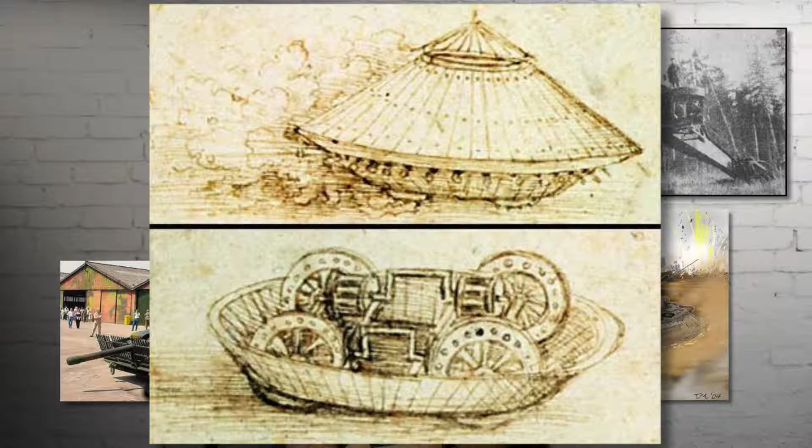So at the larger end of things, you can make an argument that these are all tanks, all four vehicles. On the top left, you have Leonardo da Vinci's tank. As a piece of trivia, if you look closely at the image, you'll see there was a deliberate design flaw that Leonardo put into his design, so that if somebody stole his plans and built the tank according to them, it would not work. Have a look, see if you can figure it out, and show off by putting it in the comments below.

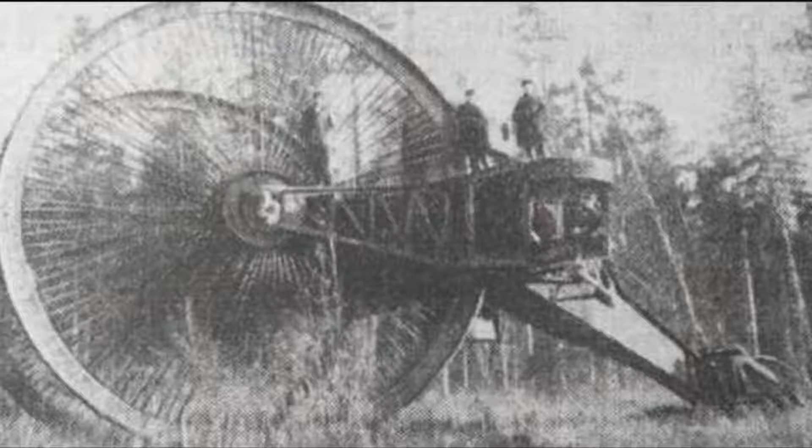The S tank, well, we all know about it now because of the Swedish line. A lot of people will say it's a tank destroyer, but the Swedes strongly disagree. As far as the Swedes are concerned, it is a tank.

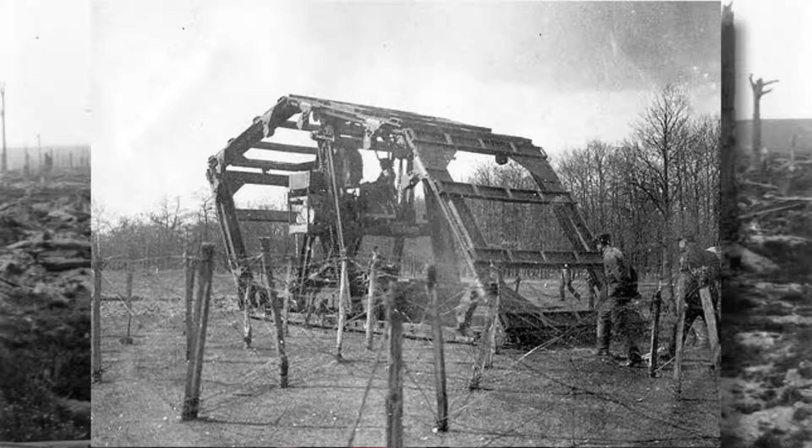So the solution appears - there were a number of different options. The Tsar tank you just saw. The French had the Boirault device, which really was more supposed to be a wire crushing device as opposed to a tank, but it did the same job - it went across no man's land. The British are the first at the door, as we all know, Little Willie and then the Mark I.

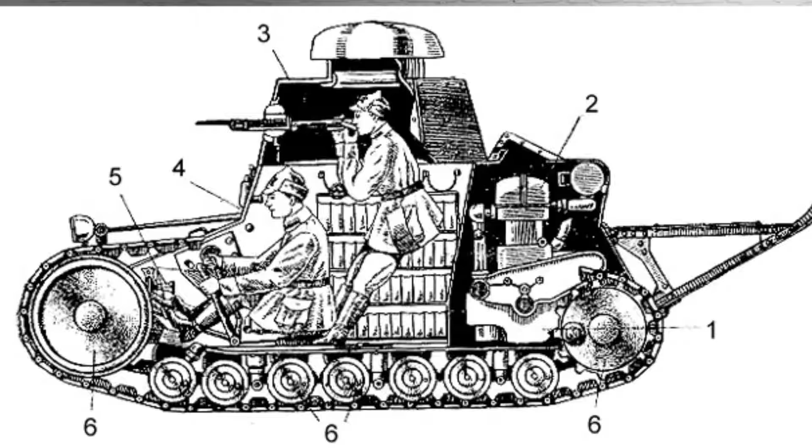And in credit to the French, they also invented the tank completely independently, because the British weren't telling the French what they were up to, and at about the same time the French also had the same idea. But they get it right with the FT, with the fully traversing turret, full-length track, driver in the front, engine in the back, fighting compartment in the middle. Pretty much every tank ever since has followed this basic design philosophy - AMX-13, Merkava, that's pretty much the gist of it.

Of course, you've got the light tanks like Scorpion and whatever as well, but that's a little off to the side. So that was why the tank exists. Now let's get into a little bit of the nomenclature and some of the design details as to why a tank looks the way a tank does.

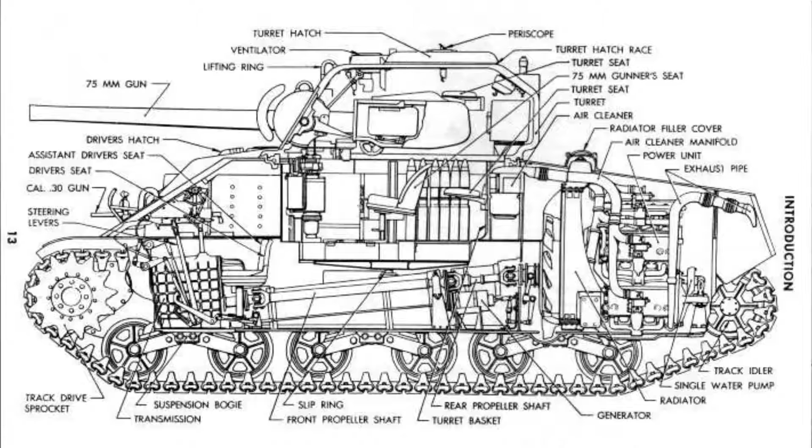So what we have here is a diagram of a typical common or garden tank. It is, as you can see, an early model M4. Various components - well, yes, the Army have helpfully labeled everything if you want to zoom in and look at the individual components, like the 75mm gun, the turret hatch. You can also see the prop shaft that goes from about halfway up the hull from the radial engine down to the base of the floor at the front with the transmission, and that's why the M4 is so high.

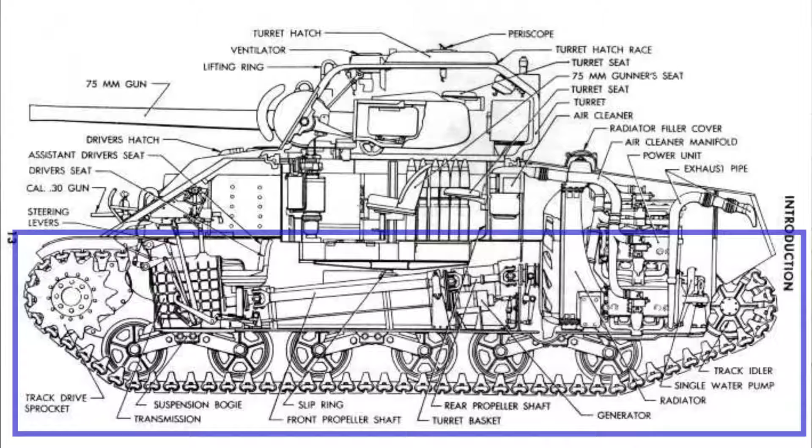However, the bottom line is that the bit you were looking for is the full tracked chassis. This is pretty much standard - I can't offhand think of any tanks today that don't have a full track chassis. Up at the front, you have the driving compartment. Today, it's just the driver's hole and nothing else. Back in World War II, you also had the bow gunner located in the driver's compartment. In the center, you have the fighting compartment. The fighting compartment can or need not include a turret.

Bingo, the S-tank, as we've seen before. But the terminology is good for assault guns and so on as well. So the fighting compartment is where the crew actually fight the tank. The engine compartment, no guesses for what that does - it holds the engine.

Of course, the Navy did invent tanks, so that's why we have so many nautical terms like the hull, the hatches, the decks, and so on.

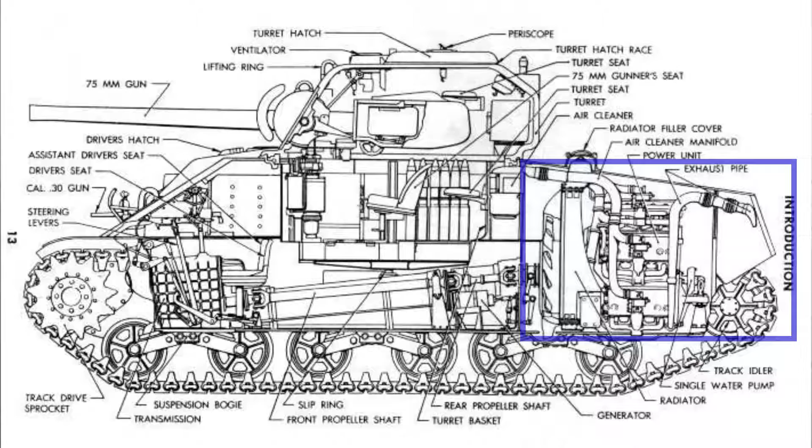So your crewman, who's in it? Well, you got the driver - a very happy little individual, almost always sits at the front of the hull. There have been some exceptions in the game.

You got the Object 416, you had the MBT-70. Part of the problem was that you had to have a system that would allow the turret to traverse while still being connected to the hull and the tracks and the engine and so on. Didn't work out too well. The 416 had traverse limitations - the M53-55 artillery piece that basically could only drive when the gun turret was facing straight forward, if I recall.

The MBT-70's driver had his own little counter-rotating cupola. The turret went all 360s, and he could drive and always face forward no matter what the turret was doing. The end result of that was he got a motion-sick driver. So the bottom line was that after many attempts, nobody has as yet decided that it is a good idea to place the driver in the turret, at least for a general tank.

There have been cases where the crew goes down into the hull, the T-14 for example being a recent case in point, but again this is something of a revolutionary concept.

The gunner, well gee, what does he do? He controls the gun. Usually found in the turret at the front, sometimes in front of the commander, not always.

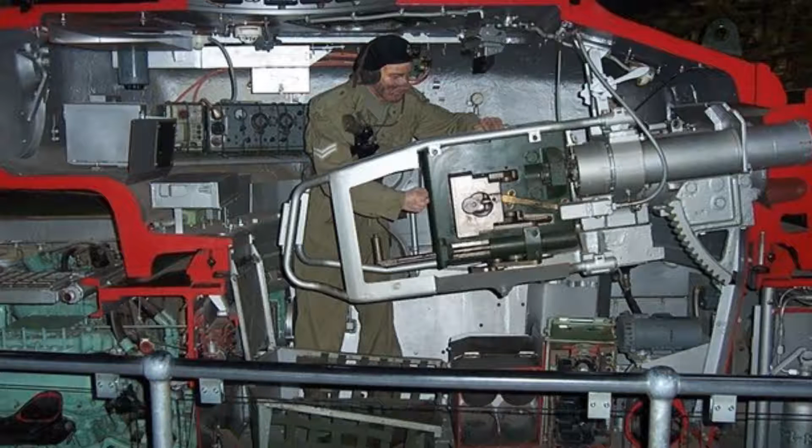The loader. This is the famous Bovington cut-in-half Centurion, and the nice thing about it is it shows you pretty easily the amount of space he has to work with. This mannequin is short, and you can also see, as a matter of tank design, how much room the breech has to elevate before it hits the top of the turret, and that brings you to gun depression.

We're going to be coming back to gun depression a little bit in the future.

And finally, the tank commander. Yes, you're the guy, you get to look all cool, you stand out on top of the tank. If you ever get the chance, be a tank commander - it's a heck of an experience. Yeah, the whole shooting at you thing happens as well, but you get over that, usually.

And the BOG, the bow gunner. Sometimes also known as the radio operator, especially if he doesn't have a bow gun of his own to play with. He will usually be found at the front of the hull, next to the driver.

And this was a position which was basically deleted shortly after the war. But in the 1950s, they decided it was a waste of space to have that extra man there. They didn't need him - it wasn't that critical for maintenance. And the ability to shoot on the move was getting better. So there was no need for the bow gun, which was considered to be semi-stabilized, because no matter what the tank was doing, the bow gunner could still adjust for motion. Whereas if you didn't have a stabilized gun, the coaxial was useless on the move.

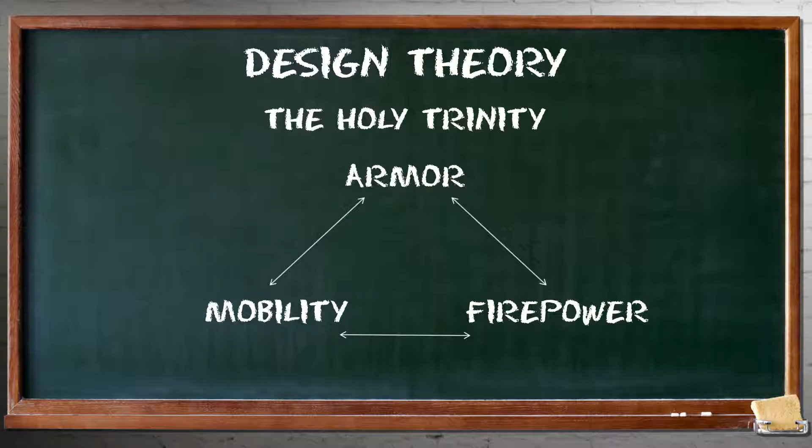Okay, design theory. You will be familiar with the Holy Trinity: mobility, armor, and firepower. And as a general rule, especially in the World War II era, you could have any two of these three. So you could have armor and firepower, like a King Tiger.

You could have firepower and mobility, say an M18, but you didn't really have engines powerful enough and structures good enough to have all three at once. So until the most recent generation of tanks, and still to an extent it's still valid, you do have that question between mobility, armor, and firepower. You have to make that balance.

Today, the engines are good enough that the tanks are plenty fast, but now you're talking into more operational and strategic mobility. You still have a 70-ton tank. So yeah, it can now do 40 miles an hour, but if the bridge that it tries to cross in Africa or wherever can't hold the weight of the tank, your mobility is still limited.

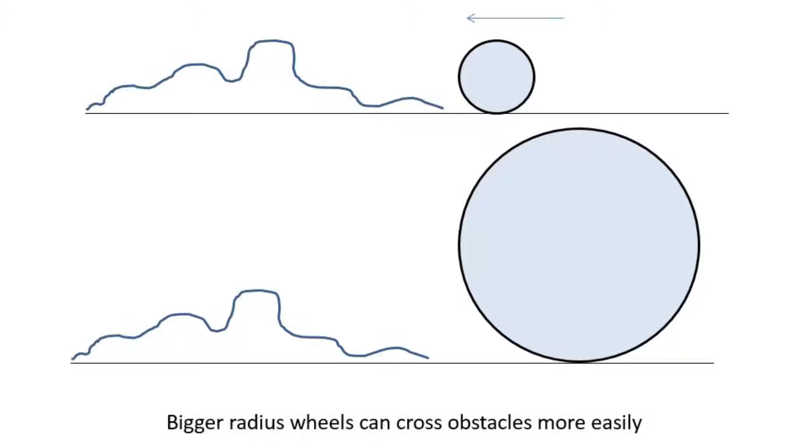So, crossing obstacles. General rule is if you have a wheeled vehicle, the bigger the wheel, the bigger the obstacles you can cross over. I have a little drawing there - a small ball rolls along, gets to a bump or irregularity in the surface, and it will stop. You get something big like a beach ball, that same irregularity which would stop a marble will not stop the beach ball - it will just crawl right on over. The Tsar tank we saw earlier was a perfect example of this - you use a huge radius wheel and it'll crawl over, in theory, anything. Of course, you had a horsepower issue, but that's another matter entirely.

Now, how does this apply to the tank? If you think about it, the track is simply part of the circle without having to have the entire circle. So in World War I, you got the Rolls-Royce armoured car - excellent armoured car - but look how small the wheel arc is compared to the wheel arc on the Mark IV. What you can see is huge. So the Mark IV has no difficulty getting over a lot of the obstacles that the Rolls-Royce would have, because of that part of the radius.

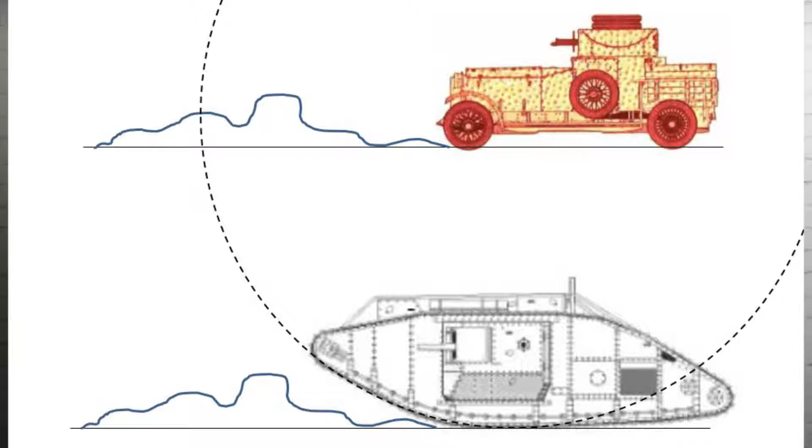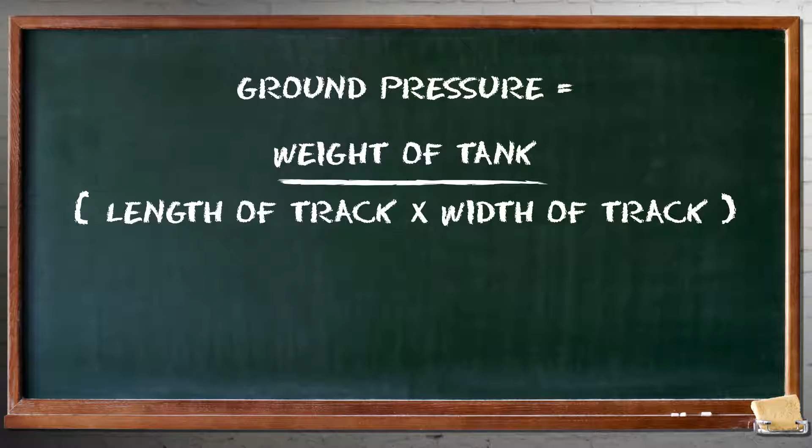All right, so a little bit more math. If ground pressure is the weight of the tank divided by the length of the track multiplied by the width of the track, i.e. surface area - long tracks are better, right? Well, yes and no. The KV6 - we did not invent this, go online, there's a wonderful backstory to the KV6. There was actually another KV6 which, if I recall, was a flamethrower, but this particular one is quite amusing.

The problem with longer tracks is that it makes turning more difficult, because when you're pivoting your track, the bits at the outside end have to go much further for the same arc of traverse. This builds up dirt as well as resistance. The dirt has a good chance of getting caught between the wheels and the track, and it'll pop it off the center guide. You've now lost your track - you've walked it off, which is really annoying.

So shorter track length vehicles will turn better. Turning is accomplished usually by varying the speed of your tracks - most people have figured this out by now. One track goes faster, the inside track goes slower, and you go around.

There are a couple of quirks, for example track warping vehicles like the Tetrarch, like the Universal Carrier. What they will do is actually bend the track itself, and that will allow you to do nice gentle turns without any of the issues of loss of power due to the various different steering systems. Very difficult to use on a heavier vehicle though, which is why you didn't see it on anything else, but it was an interesting way of getting around the problem. Of course, if you spun the wheel all the way around, one track would lock and then you'd spin normally, but innovative.

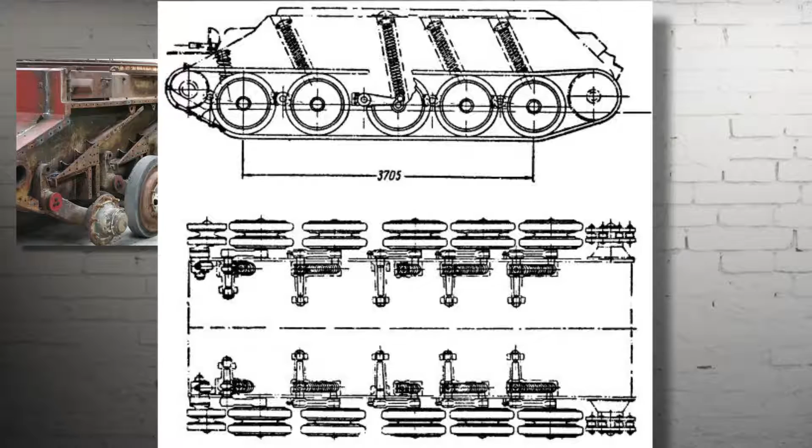So the top image is of a T-34. The springs you can see go all the way from the base of the tank to the top of the hull. The bottom image is one of the British cruisers, and the springs are missing, but you can see where they would go behind the armor plate. So your bogie breaks - a couple of bolts, replacement, you're done. A spring breaks on your Cromwell, and all of a sudden you're removing track, you're removing wheels, and you're removing armor plate. So that was one of the problems with the Christie suspension.

And part of the reason is it's a little bit overrated, and it also took up a lot of internal volume that a bogie doesn't. Torsion bars are the more typical form of suspension today.

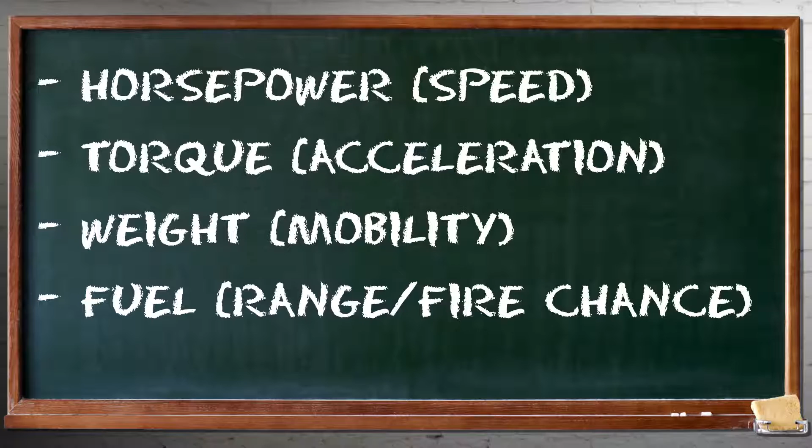So that was just the track. Then you got to get the thing to go, and that means your engine. Factors which affect your engine: you're looking at horsepower, torque, weight, and fuel. Horsepower is basically how fast you go. Torque is how quickly you'll get there, or if you go up to a tree or a wall or something like that, how much of it you'll take with you when you go through. Engine weight is a factor - a lot of the early war engines were actually aircraft engines because they gave a high power to weight output.

Later on, engines got more powerful, so it was a bit less critical. But even today, if you look at the turbine engine on the M1, it provides a lot of power for very little weight. You save a couple hundred kilos here, a couple hundred kilos there, and soon you're talking some serious tonnage. It does start to make a difference where you can add or reduce weight around the tank.

Even today they're talking about replacing hydraulics with electrics, and that will save, I think, about 1.5 tons of hydraulic piping. Fuel.

It's got two factors. One is your fire chance, which is a little bit overrated, but I'm sure we'll come back to that in a future video. And the other is range - how far will you go on a single tank of gas?

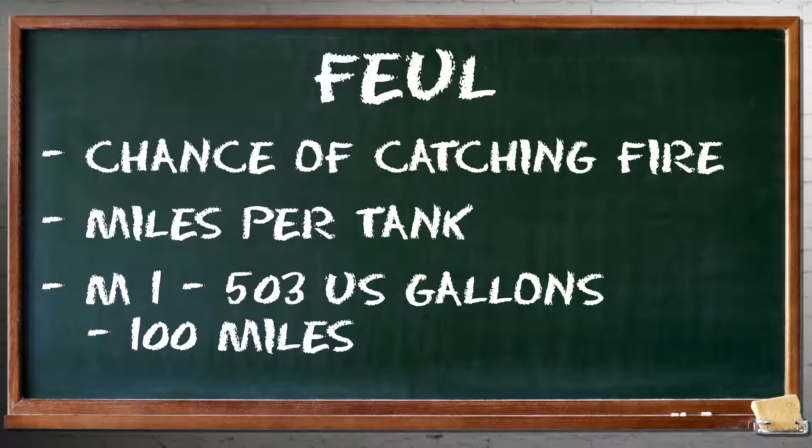The M1 is 503 US gallons, and you're pretty much looking for another fuel truck within 100 miles. It'll go further if you're cruising the whole way, but in reality you're never cruising at a constant speed for 250 miles, except on the test range.

This would be a factor all the way down through the war, of course. So even in the race across France, the Allies were limited by the amount of fuel they could get through - that's another argument entirely. So yeah, you have the logistic issue, how do you get the fuel from, let's say, the UK to France, and hence you got Pluto, a pipeline under the ocean.

But then once it got onto the land, you had to get it into the tank itself, and that was by jerry cans, or in British terms, flimsies. You're talking about filling up several tanks, 80 gallons, let's say 100-something gallons, with individual cans. This is really annoying and takes a very long time, so the less you can do it, the better. It's more efficient on your logistic tail, it's easier on the crewman, and so forth.

So ideally you want to get the best possible range for your tank as you can, which then brings you to the diesel versus petrol question. Diesels will get you further range, but back in World War II era, they weren't quite as powerful as they needed to be compared to petrol engines, or gasoline if you're American. So that's why most tanks around the world were using gasoline.

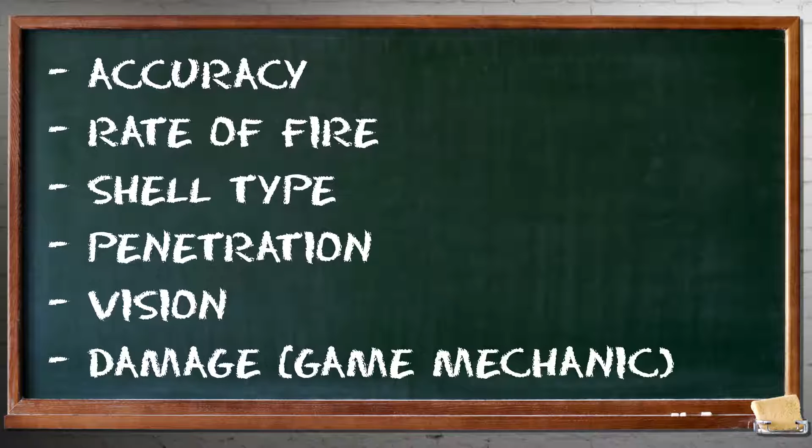Firepower - well, these are some of the factors that affect firepower. Accuracy is one of them, rate of fire, shell type, penetration, and vision. And then, of course, in game terms, damage done at the other end. If any of these things fail, your purpose of the tank is gone.

For example, vision - he who sees the enemy first will probably shoot first and will probably win. It's something a lot of people don't look at when they evaluate a tank. Oh, the Panther had the L70 gun, which has huge penetration and is very accurate. Yes, but if you can't find a target to hit in the first place, what good is your gun doing? On the other hand, you may have the best vision in the world and auto tracking and so on, but if your gun will just ricochet off the target, what's the point?

So you do have that balance as well, but they're all different factors. Different tanks achieve them to different levels.

Things that affect accuracy: the speed of the round. This does two things. One, it reduces the amount of lead that you need to hit the target. Try hitting a light tank in World of Tanks with a KV-2 that's careening along at 50 kilometers an hour, versus trying it with something a little bit faster like a Panther. You'll see obviously that the faster round is more likely to hit.

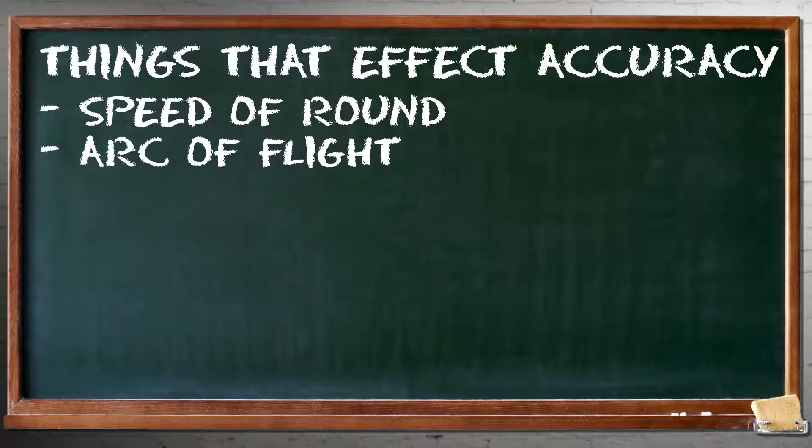It's easier to aim. The other issue is arc of flight - you lob a round, it goes whee in order to hit. Do you like the sound effect? As opposed to the high velocity round, which is simply flat. Now the reason that's important is because, especially back in those days, your arc could be quite high, so you had to know exactly how far away your target was. Otherwise you'd be lobbing it.

If you're off on range, you'll either go over your target or fall short. If you have a flat trajectory weapon, estimate the range close enough that chances are you will hit it. That goes into the whole battle sight range question, which I've talked about elsewhere. Also, if you're a hunter, you may know it as maximum point blank.

Stability of the round also comes into accuracy. If the round is wobbling as it goes down range, chances are you will miss, and you may also get reduced effectiveness because the round will twist instead of punching straight through. This was particularly an issue with early sabot ammunition in 1944-45, and it took quite a while before the US was impressed by the stability of the sabot round before they finally converted to using it.

The quality of the sight. If you aim at a fuzzy thing and your reticle sucks, you're probably not going to hit it.

Quality of stabilization if you're firing on the move. Early British tanks, the stabilization was the gunner crouching down on his knees, bending his knees as the tank moved. It was very basic, but it kind of worked. After that, when the guns started getting heavier, more than about a 6-pounder, you had to start using mechanical stabilization, and that was basically confined to the American tanks until just after the post-war era.

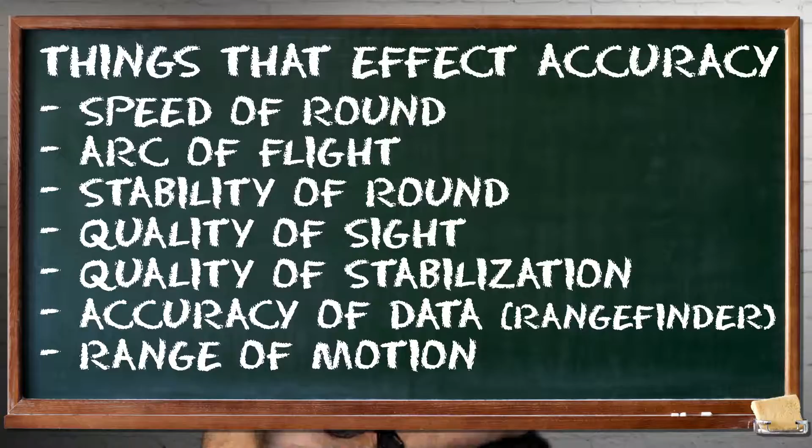All right, so that's simply getting a shell onto the target. Then you have rate of fire. Rate of fire has a couple of different factors. Firstly, obviously, how many targets you can engage in a certain amount of time.

Things which affect your rate of fire: the size of the round - bigger rounds will take longer. How many loaders do you have? If you've got 2-piece ammunition, you may be better off with 2 loaders instead of just 1.

How much space do you have to work with? If there's only a very limited amount of space for you to manipulate that round, it's probably going to take you longer to get the round out through this one path within your turret into the breech and up, than if you could just pick the round up any way you got it and immediately slam it into the breech. So if you've been following my Inside the Hatch videos, you probably have a vague idea of the differences by now.

Number of pieces per round, already mentioned. Time to aim. So what usually happens is that your rate of fire is not actually limited by how fast your loader can put rounds into the breech, especially for the first couple of rounds - he's very good.

After the first 10 or 12 rounds, depending on the tank, things really start slowing down though. Even in a modern Abrams, for example, there's what we call a sweet spot where you can take the rounds out really quickly, but then you start reaching around other parts of the ready rack, and it takes longer to get the round into the tube.

But for aiming purposes, the gunner still has to find the target, lay on the target, and then finally engage. This takes time. Then when you fire a round, you've got obscuration - the dust and dirt kicked up - so you can't see where your round landed. Even if you hit the target, you still have to wait for the dust to clear before you can see the effects on target and then either acquire and lay onto a new target or service it again.

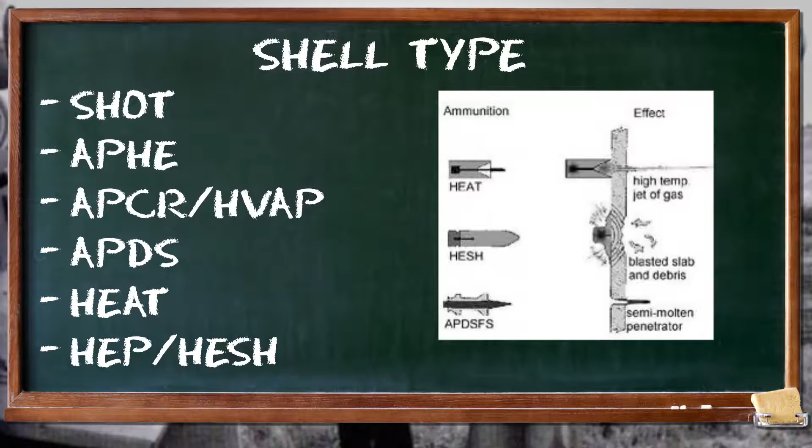The US Army has gone away from HEP since they went to the 120. The British still very much like it. What this does is it lands a cowpat of explosive onto the armor, faces off against it, then detonates, and the shock waves will then blast through the armor, causing bits on the inside or fixtures to break off and fly around and give people inside a bad day.

What affects penetration? As a general rule for a kinetic energy round, it's how fast it's going and how heavy it is. That's why a lot of them are made of depleted uranium, tungsten, heavy metals. For a chemical effect round, it's how wide the shell is, the diameter of it, and it goes up on an exponential basis. And finally, you also have little quirks like normalization, shatter gap, and so on.

Normalization is the tendency when a round hits to turn into the armor plate, and it increases the effectiveness. That was one of the problems with those tanks that used tracks on the outside as additional armor - the tracks are made of a softer steel, they're not armor plate. So what would happen is an incoming penetrator will hit the track, hit the softer metal, turn into the soft metal because that's what normalization does, and now it is going at almost the same speed directly into your armor plate.

Gun depression, perhaps the most important stat in the game that nobody pays attention to. As a general rule, tanks with more depression will provide a smaller, defensive target, and they will shoot earlier if they're going over a hill.

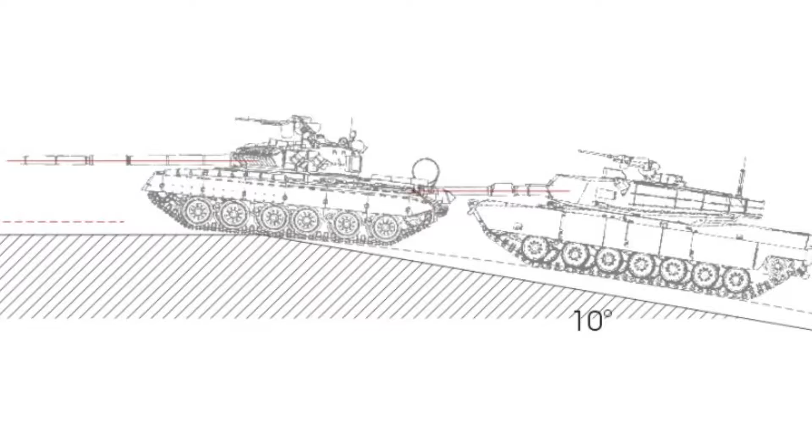If your tank has good gun depression, chances are it is a taller tank and easier to hit if it's not in a defensive position. The two pictures we have here, one is an Abrams, one is probably a T-72. You can see that the T-72, although it is a smaller tank, actually is providing a larger target because it has to go further over the hill in order to get the gun low enough to shoot. But if you're attacking over open ground, if you're in an offensive-oriented army, you probably want the T-72 because it's smaller and harder to hit.

So, the effectiveness of armor - this is now a trade-off between weight and volume. More volume means more room inside the tank that needs to be protected. This means you need more metal to protect the tank, which means that for the same amount of weight, you have less armor effectiveness. And that's one of the reasons for autoloaders - you make the tank smaller, you get more armor for the weight.

Angled armor increases protection, but reduces internal space. That's why you don't see it as much anymore. The T-34, for example, is lauded for it had angled armor everywhere. Yes, it did - it made it pretty hard to penetrate. It also made it pretty hard to operate because you just didn't have the space.

By way of an example of the practical effects, there are calculators online if you are that curious. With a little bit of slope, not much happens for the first 10 or 15, 20 degrees. Once you get over a certain level though, that little bit more slope starts really increasing the effective horizontal thickness of the armor plate.

The last requirement today, and this was a topic at one of the Operation Think Tank discussions, was: okay, we've had the Holy Trinity, should that be modified? The fourth answer that came out was communications - the ability of a tank to talk to every other tank, let them know what is happening, situational awareness. In World of Tanks terms, that means look at the little mini-map in the bottom right corner of your screen. Too many people seem to ignore it.